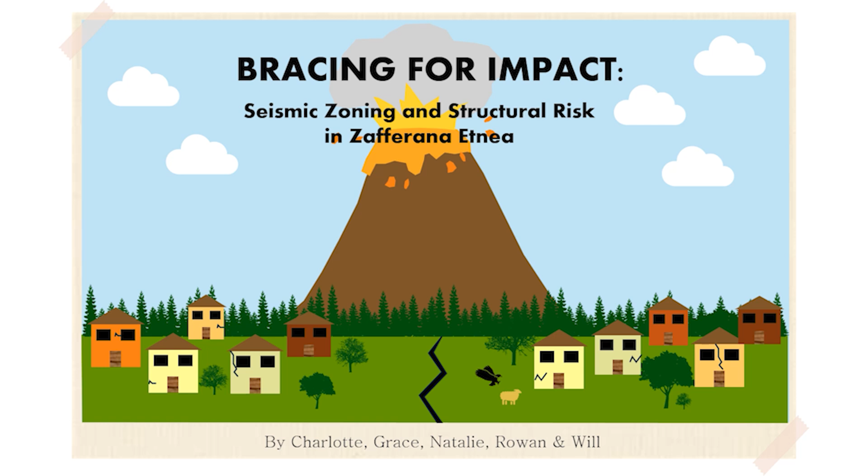This study, Bracing for Impact, assesses the seismic conditions and resilience of Zafferana Etnea's built environment, offering insights through seismic zoning into how at risk the community is to structural collapse.

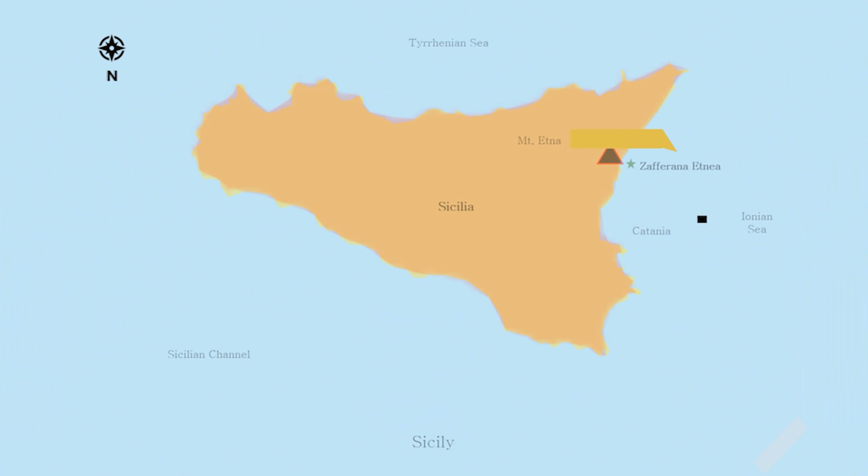This study was carried out on the Italian island of Sicily, located in the Mediterranean. Zafferana Etnea is on Mount Etna's eastern flank, located 30 kilometers from Catania.

Sicily has many active fault lines running through it, with the Siculo-Calabrian seismic belt being where the largest earthquakes have occurred in southern Italy for over 6 centuries.

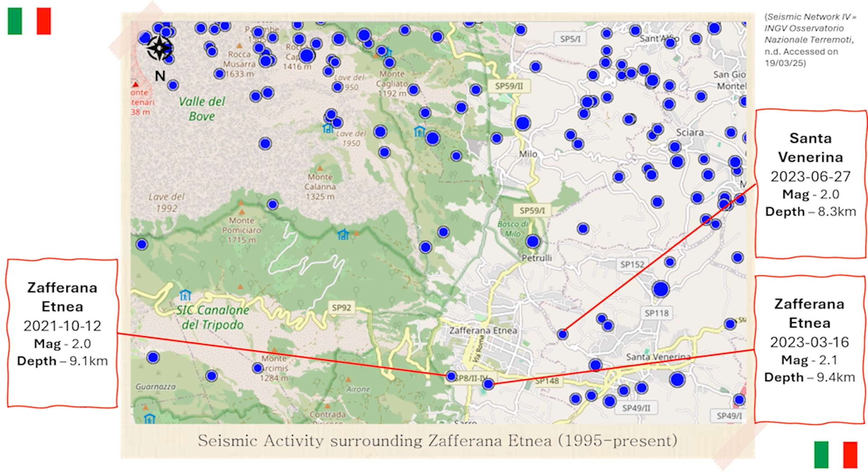This figure shows that many smaller events have occurred around Zafferana Etnea, averaging around a 2.0 magnitude but relatively close to the surface. When earthquakes occur close to the surface, more damage usually occurs. Assessing the structural integrity of buildings is important in case bigger earthquakes were to occur in this area.

Adding to the seismic background, this area has experienced numerous larger scale earthquakes in the last 200 years, which have caused large amounts of damage, like in 1984, which resulted in 70% of homes becoming uninhabitable, likely as a result of unkept building codes.

The history of building codes in Italy is sparse, with a lack of readily available information, though we do know that there have been 3 major adaptations to them from 1974 to 2009, which show an understanding of their building techniques. Reinforced concrete structures and base isolation are some of the examples from the 2009 code, aiding to be more resilient towards earthquakes.

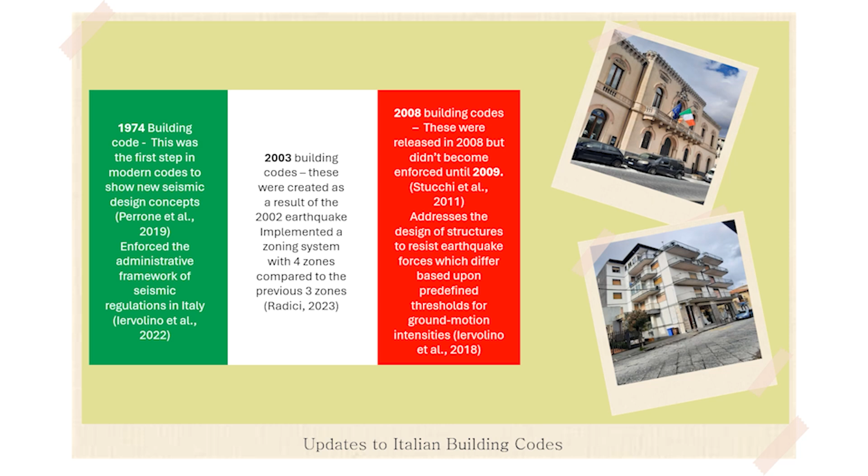This is an important consideration, as during ground shaking, buildings need to be able to withstand the effects of this. Parameters such as good building design, flexibility, and the use of strong construction materials enable foundations to absorb or redistribute seismic waves.

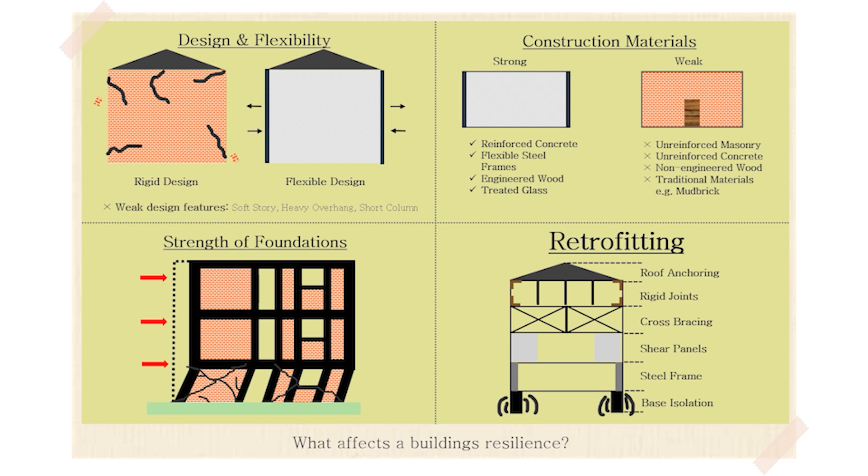Retrofitting is needed in built areas of high earthquake damage risk, especially when occurring at shallow depth. Features which can be an indication of high earthquake damage risk include soft stories, which are ground floors with large openings, for example a garage door or shop front.

Short columns, which are half floors located in between the main stories. Heavy overhangs, which are decorative parts of a building like balconies. And visual construction quality of buildings, which can range from good to poor depending on surface cracks, foundation quality and other factors.

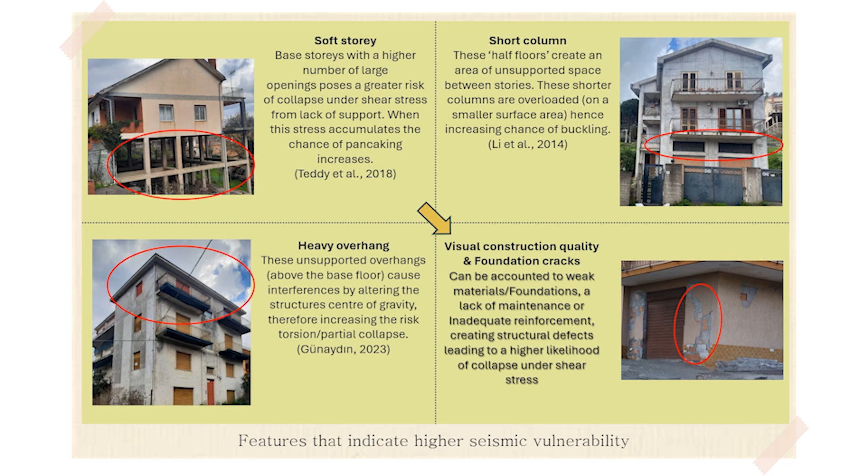These features are highlighted here in the pictures taken in the field during our study. Using this prior research to ensure an understanding of vulnerable building features allowed our study to take place effectively.

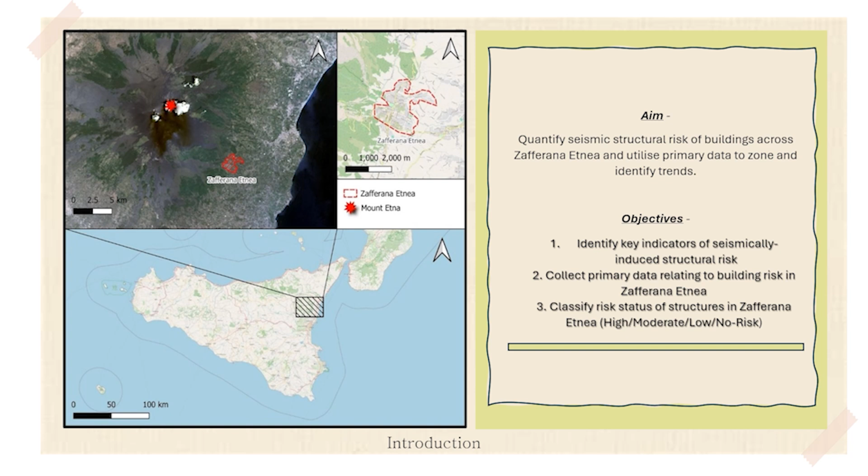Our study aimed to quantify seismic structural risk of buildings across Zafferana Etnea through the use of in-field data collection. This was reinforced by our research objectives and allows for the identification of trends in risk and what parameters significantly increase this in Zafferana Etnea.

Our walking routes were split in half over 2 days, which were adapted in situ to ensure a good proportion of building stock was analysed within the time constraints.

Along these routes, we sampled every 6th building systematically and picked unique buildings as points of interest for a purposive sampling following the same methodology. This methodology was based upon a previous study carried out in Turkey, which we adapted to Zafferana Etnea.

The risk factors for each building assessed were identified, then subtracted from the base score, which is given on the number of stories a building has. This final score then shows how at risk the building is, ranging from above 100 at no risk to below 30 at high risk.

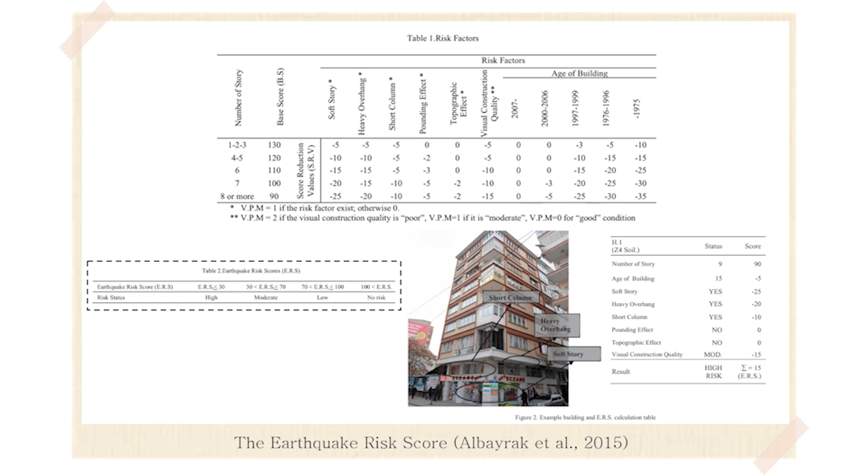The earthquake risk score values were changed for our data range once calculated post-field work.

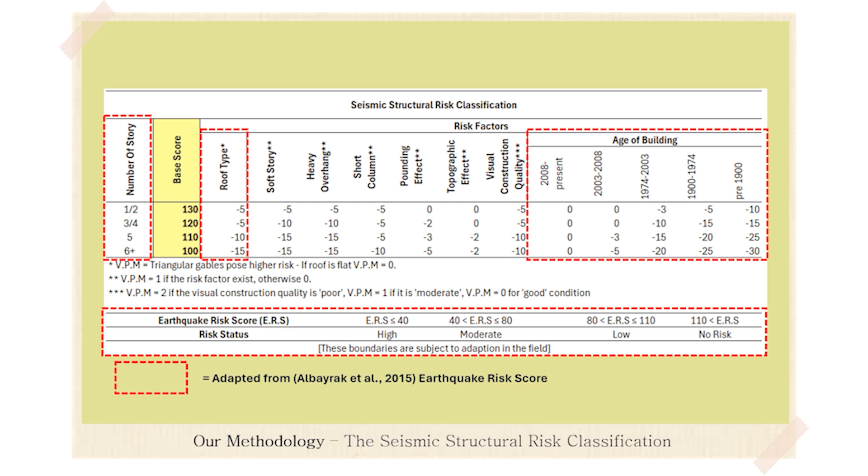To conduct a hazard assessment, we followed these steps, which include finding the building's GPS location, its number of stories, the score reduction values, and calculation of the earthquake risk scores and risk status. This short video shows us conducting a building assessment in Zafferana Etnea.

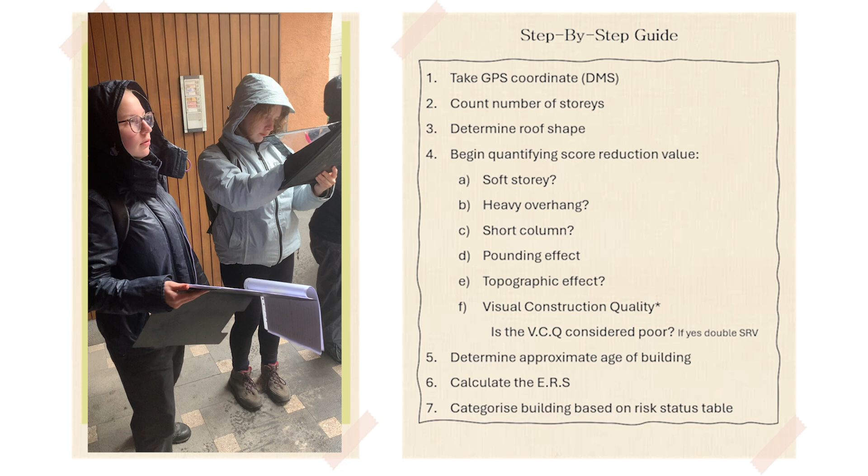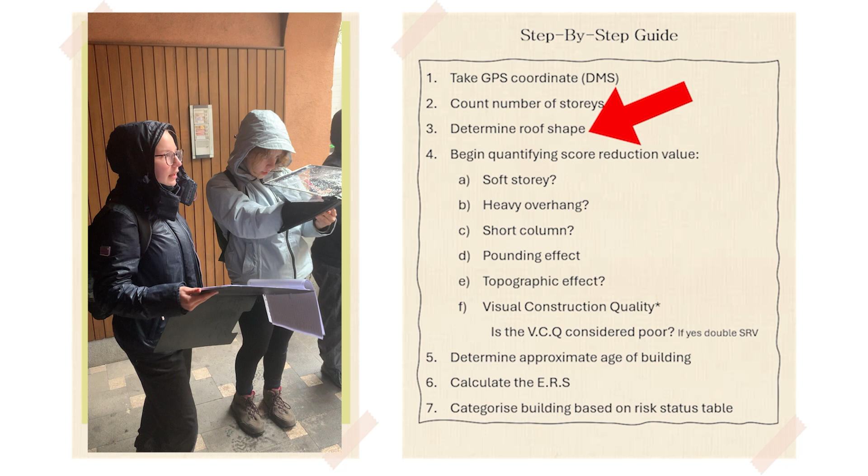So we're on Via Roma, house number 302. There are 2 stories and it has a flat roof. We are a soft story building as we have a garage.

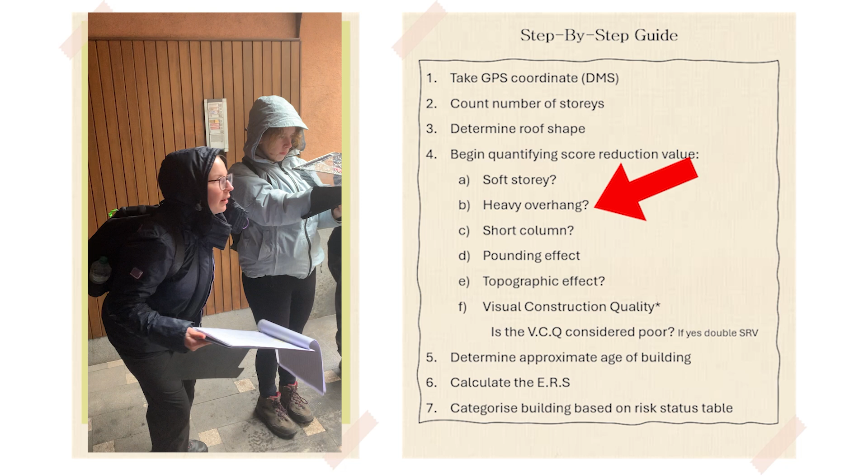There's heavy overhang from a balcony, from 2 balconies. And there's no short column. Pounding effect, yes, due to the differences in houses.

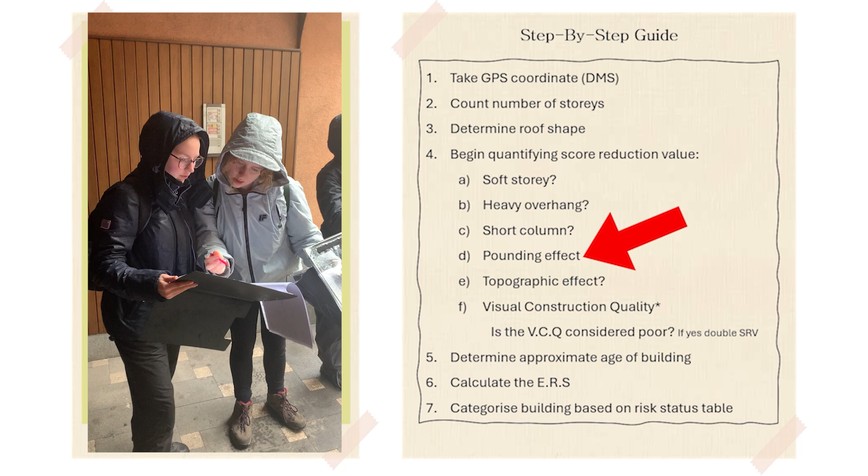It's still zero for that one. No topographic impact. No visual construction quality.

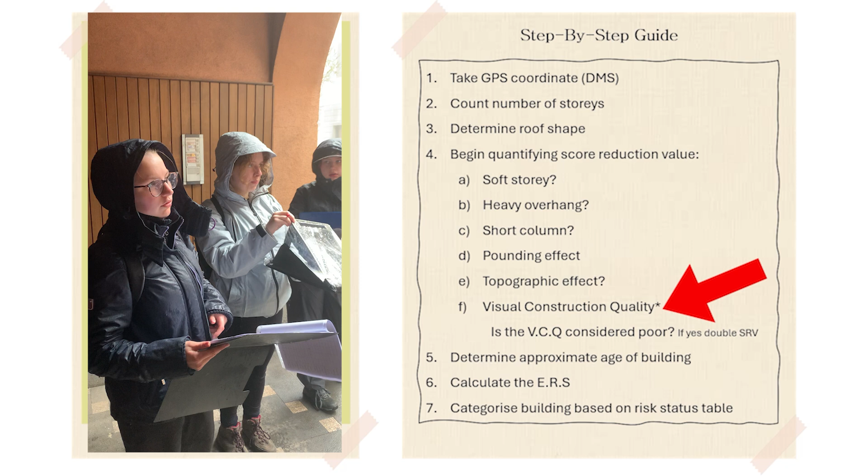It does look like some issues. When you went over, was there cracks in the building? There might have been a few, but I don't think any of them were into the foundation. I think they were just superficial cracks in the paint.

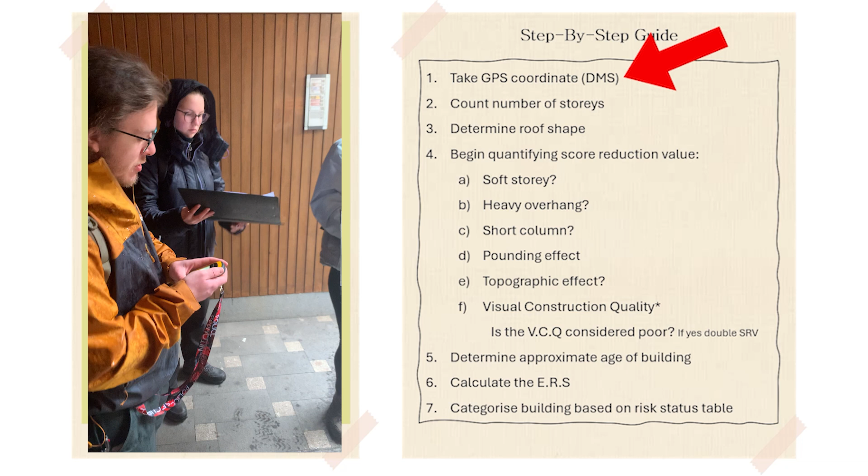So the coordinates for the left-hand corner of the building are 37 degrees, 41 minutes, 38.5 seconds north, and 15 degrees, 6 minutes, 24.8 seconds east.

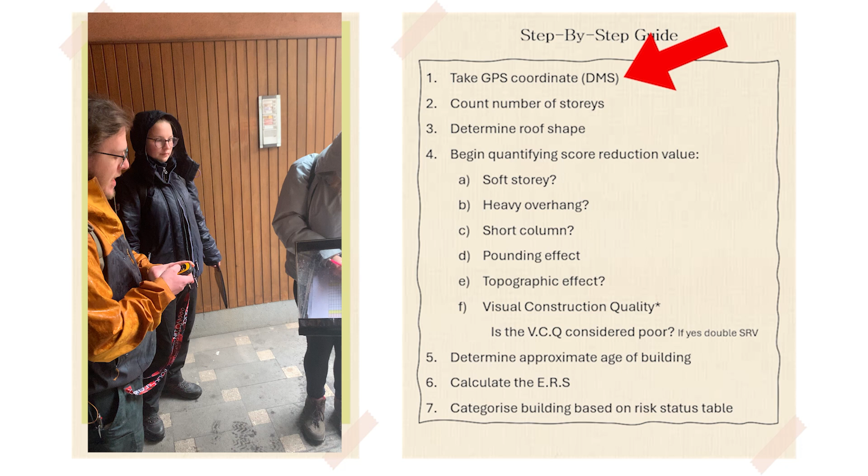This is a sample of the digitised data from the field survey.

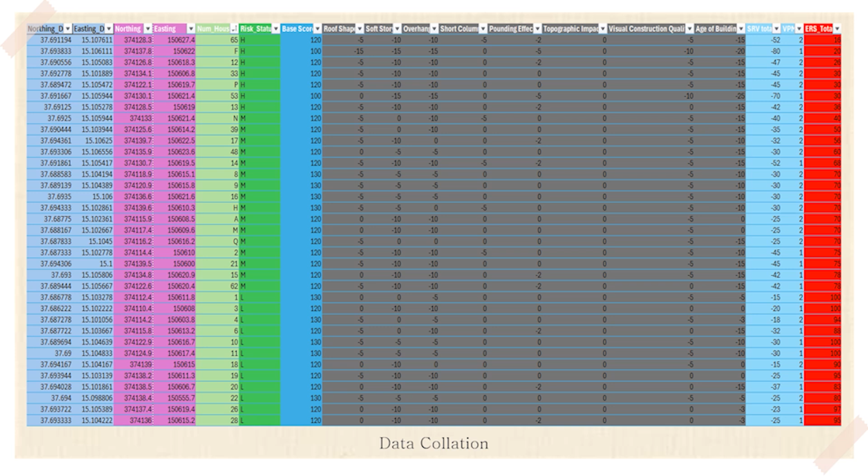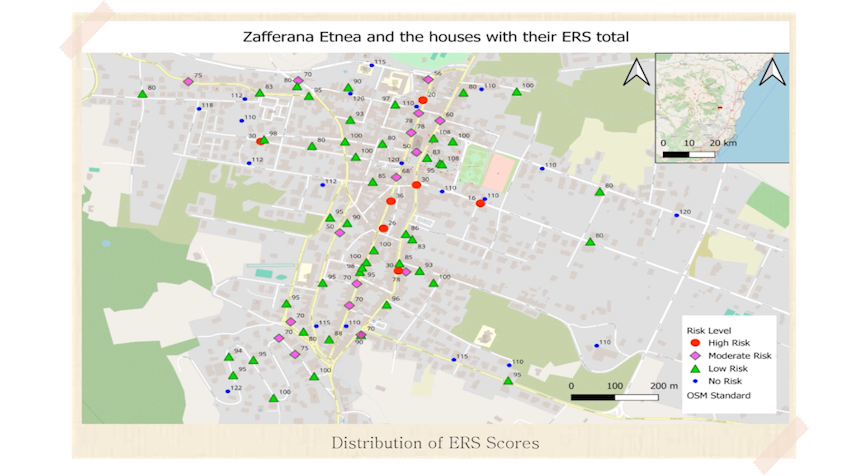This reinforces observations about areas of risk, with the central streets of town having higher risk areas than the outskirts and residential areas, with minimal outliers.

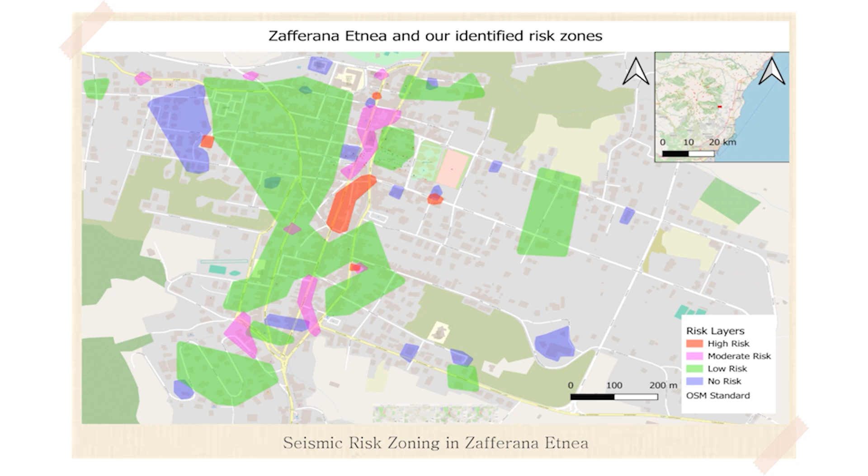These images were taken from the field study and show an average house with no risk, low risk, moderate risk, and high risk.

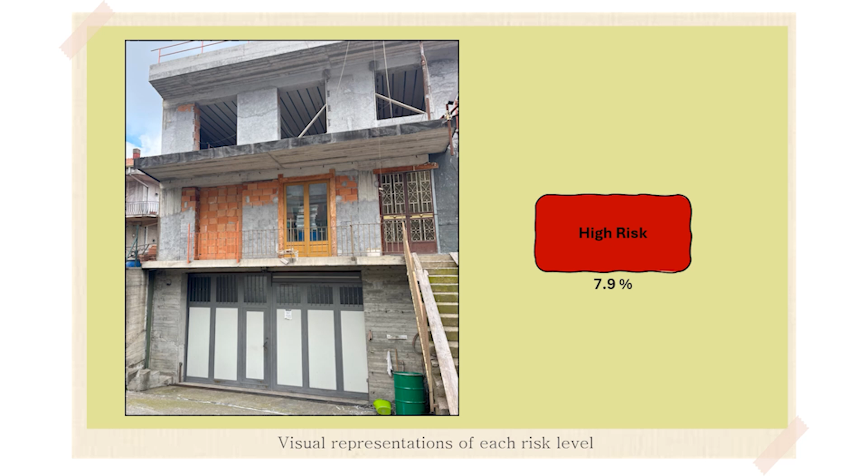78% of the buildings assessed had at least some level of seismic structural risk, with 67% of these being low risk.

22% of buildings in Zafferana Etnea are at no risk to structural damage from earthquakes. 52% of buildings are at low risk, 18% of buildings are at moderate risk, and only 8% of buildings are at high risk.

The low-risk buildings had a mean ERS of 87 and comprised of roughly a 6:1 systematic to purposive ratio. The most common risk factors present were overhangs and soft stories, and every building had under 5 stories total.

Moderate risk buildings had a mean ERS of 67, with 3/4 having an at-risk roof shape, with a systematic to purposive ratio of roughly 2:1.

The most common risk factors identified in this risk status were soft stories and overhangs. Over 90% had a moderate or poor visual construction quality.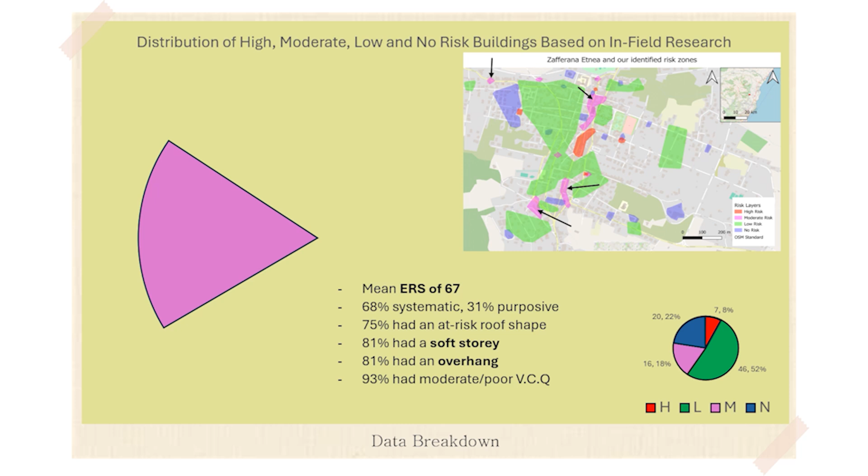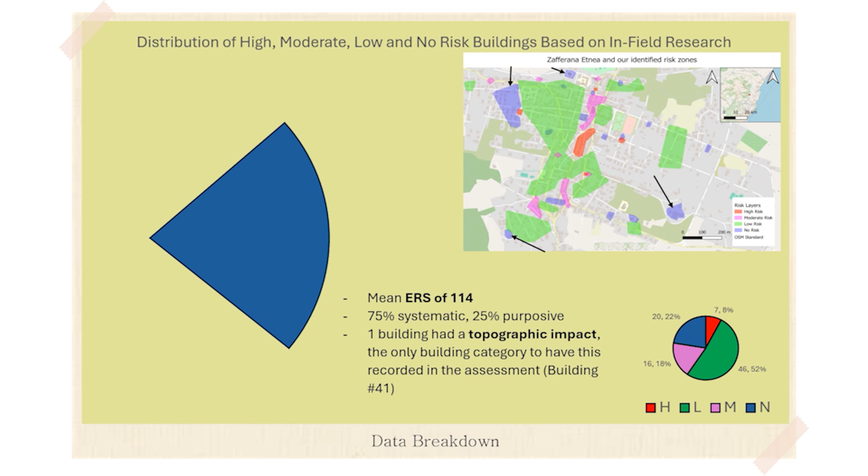No risk buildings made up the final 22% of buildings assessed, having a mean ERS of 114. This was the only category to have a building with a topographic impact as a risk factor, which is where a building is on a slope of greater than 30 degrees.

A total of 89 buildings made up our dataset over an area of 329,214 metres squared. 100% of these structures had at least one risk factor attributed to them, with the top three most common categories being roof shape, the presence of a soft story, and heavy overhangs.

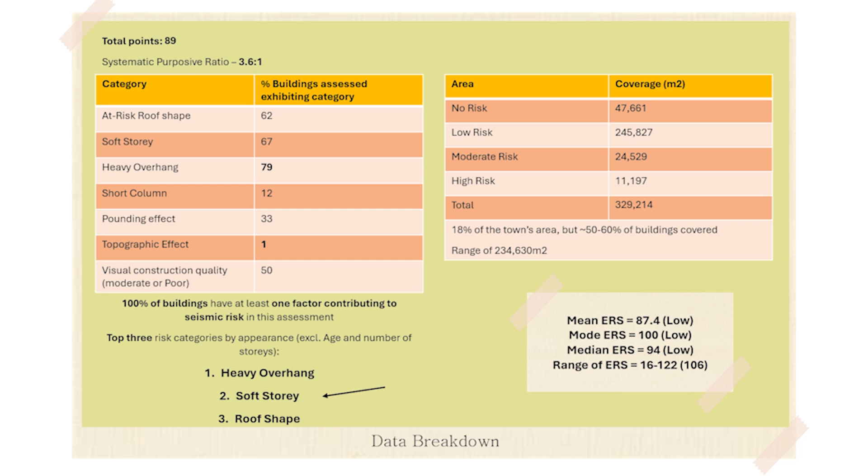The largest risk status was low risk, making up 75% of the zoned area. The smallest area was high risk, comprising 3% of zoning in Zafferana Etnea.

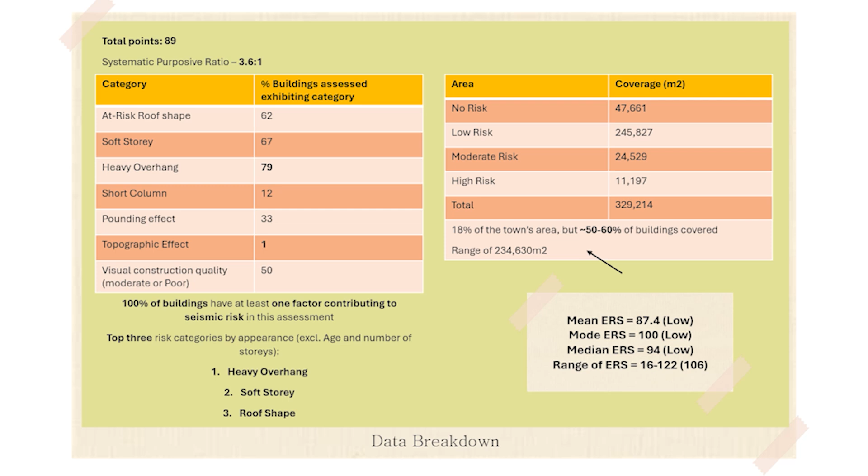18% of Zafferana Etnea was zoned based on our data collection. However, visual analysis shows 50 to 60% of buildings are included within our zoned areas.

The average ERS of our entire dataset was 87, meaning that on average, the town of Zafferana Etnea is at a low risk.

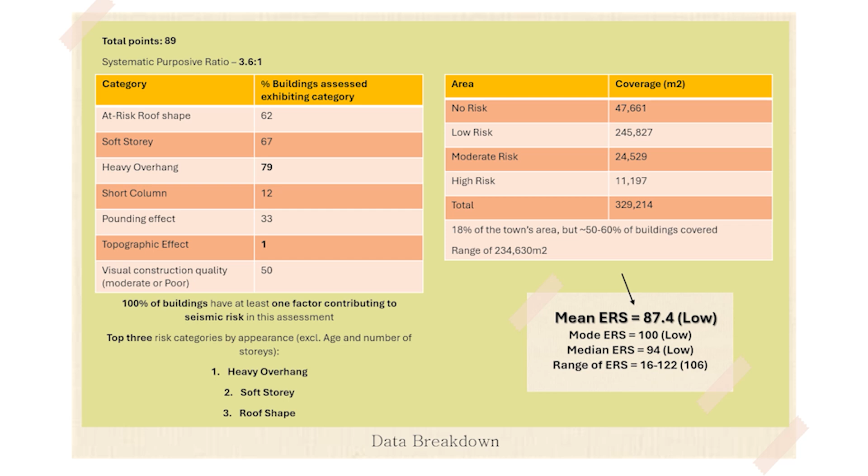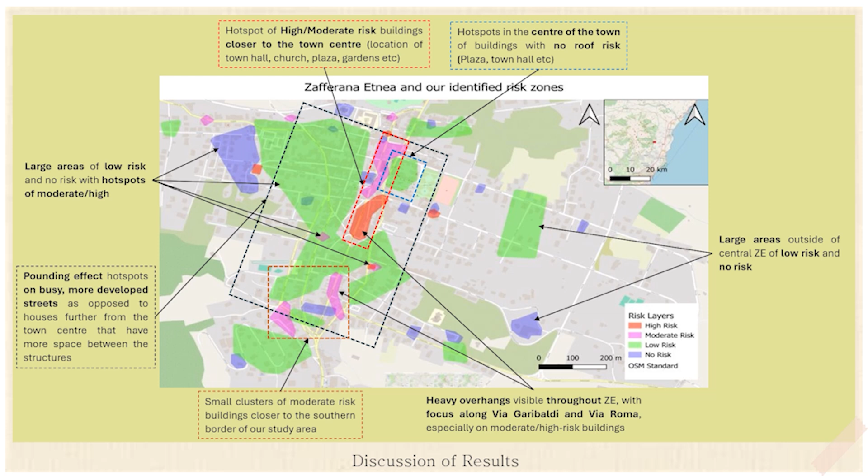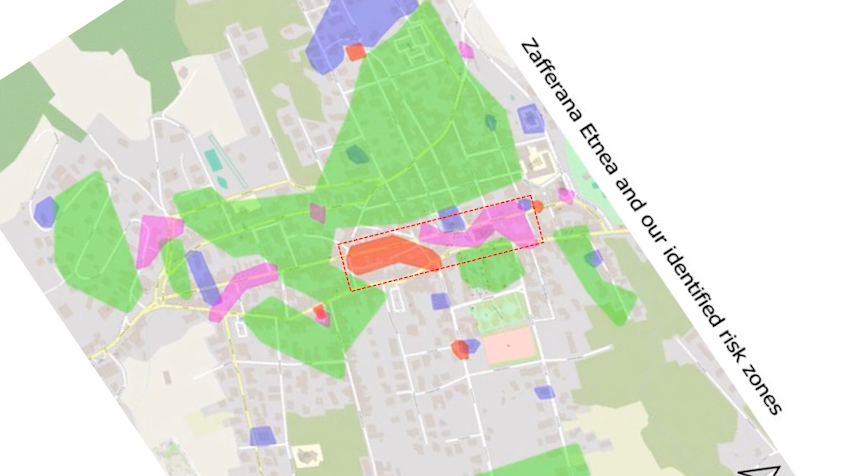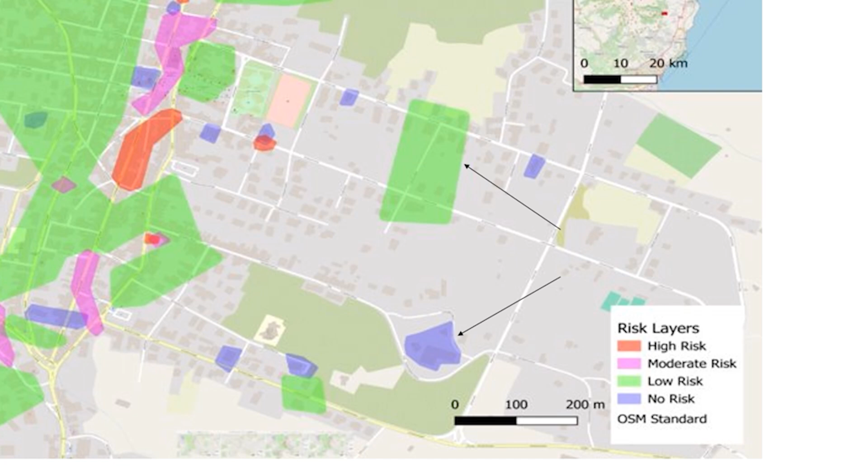Visual analysis highlights several trends across Zafferana Etnea. A hotspot of high to moderate risk buildings are located closer to the town centre, which is the location of the town hall, church, plaza and gardens. Buildings in the centre of the town, specifically in the plaza, have no roof risk. Large areas outside of central Zafferana Etnea have low risk and no risk.

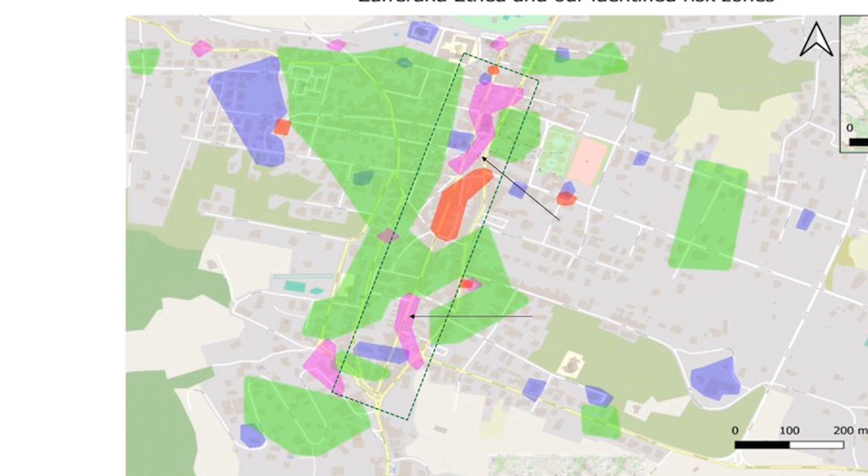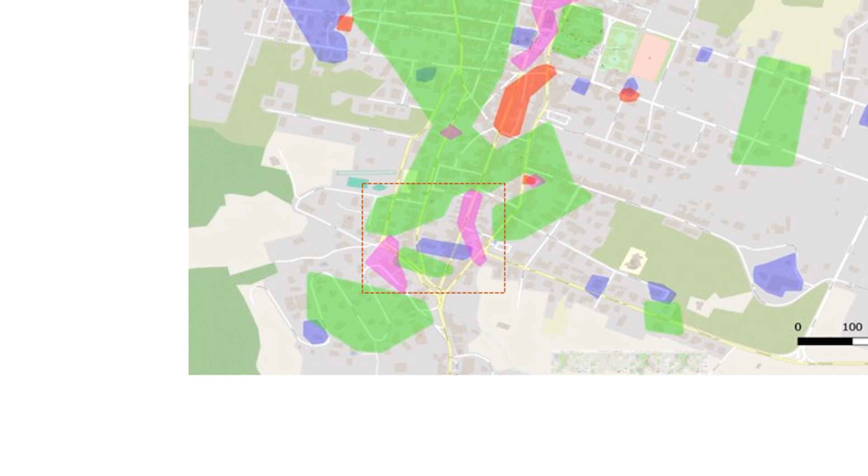Heavy overhangs are visible throughout Zafferana Etnea, especially along Via Garibaldi and Via Roma on moderate to high risk buildings. A small cluster of moderate risk buildings exists near the southern border of our study area. Pounding effect is present on busy, more developed streets as opposed to houses further from the town centre that have more space between the structures.

Multiple strengths were highlighted through our study. The customization of risk factors within our seismic structural risk classification allowed for the study to be applicable to Zafferana Etnea.

The refinement of these factors was supported in our pilot study to ensure the correct parameters fit the location. The assessments for each building were very efficient, getting down to 45 seconds for one building. This allowed a representative sample of the town to be assessed within the time limit. The use of resource packs and specific role allocation within the field allowed for a rapid assessment to be undertaken.

Adaptations on the fly were conducted, such as the change to Google Street View to finish the study. This allowed for a comprehensive and representative data collection to be completed despite lack of being in the field.

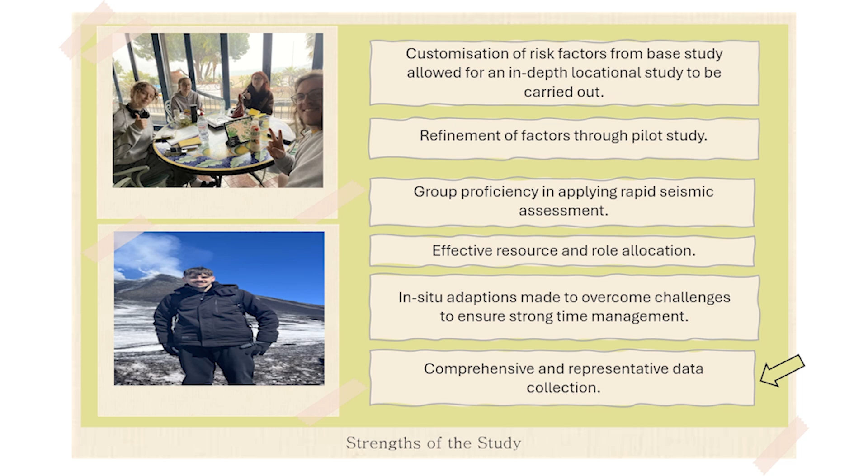Our study did compose of some limitations. Focusing on denser areas could have skewed results, meaning that while the centre of Zafferana Etnea was assessed fully, there may be areas of higher risk status in less dense areas, but have been missed due to the lack of ability to assess them within the time limit.

This was somewhat mitigated with the purposive methodology, ensuring historic buildings, buildings of interest, and buildings at a state of collapse were not excluded. There were issues with construction quality and building age, as they were more difficult to determine, resulting in open discussions in the field. This could have led to a difference in opinions and results depending on who was assessing the building.

Weather conditions caused the end of in-field data collection on day 2, with us finishing the study remotely. These images from Google Street View were from 5 to 10 years ago, meaning that buildings could have changed and been updated since then, but we wouldn't know, therefore hindering our assessment's accuracy in a contemporary context.

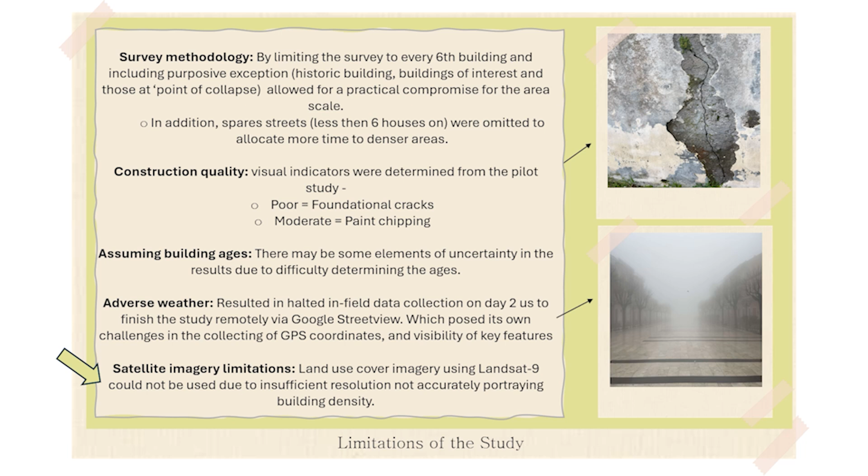If this study was to be replicated, more days should be allocated to in-field data collection to ensure a larger sample is taken to be able to survey the town as a whole. This could also be done through the division of the team.

A more in-depth preliminary investigation to have a better understanding of these characteristics in town should be conducted to ensure in-field parameter decisions were more objective. Now the area is better understood, risk factors and values could be refined further.

Increased documentation of the study would have allowed for replications of the study to be made more easily accessible.

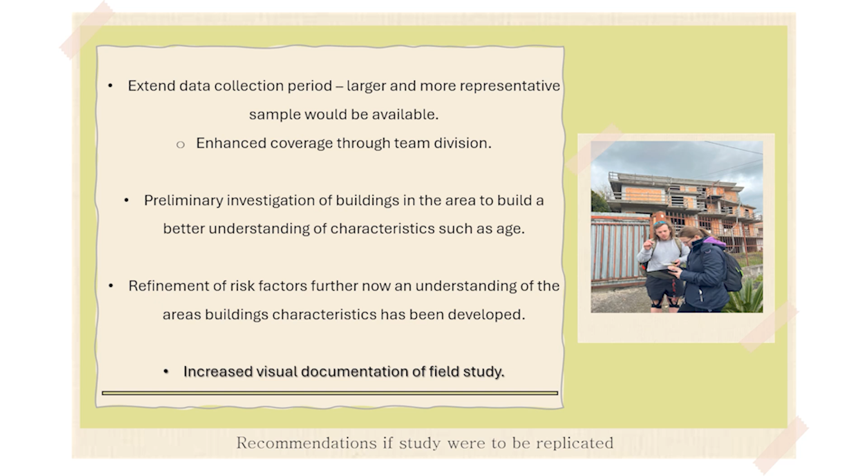To conclude, we believe that this study was greatly successful and we achieved our aims and objectives. We successfully quantified the earthquake structural risk of Zafferana Etnea buildings and identified key indicators. A representative sample of the town was taken over a 2-day study period, with adaptations made to ensure as much primary data was collected as possible.

Zoning of the town identified different classifications of structural risk levels across Zafferana Etnea. Overall, our research concluded that the town of Zafferana Etnea is largely at low risk to structural seismic damage, and the leading factors of structural risk in Zafferana Etnea are heavy overhangs, soft stories, and roof shape.